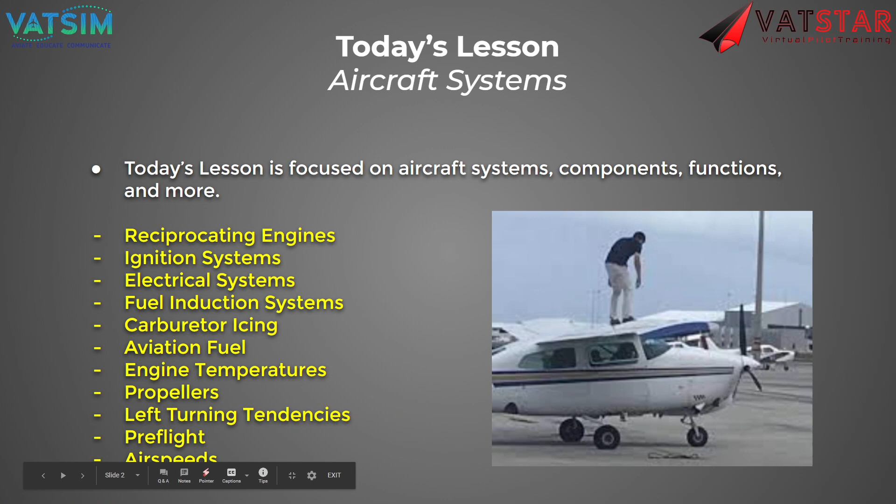And remember, guys, you got to look at aircraft systems from all angles. I mean, look at this guy right here, he's really getting it from the right angle. Please don't walk on top of your Cessnas, it's not advised. All right, so we'll get right into it.

Aircraft are powered by reciprocating engines, which are made of cylinders, pistons, connecting rods, and a crankshaft. And that's very similar to most engines in cars.

Does anybody here know what kind of engine you'll typically find in a car? Is it a certain shape? Anybody want to step up and answer that? How about Andreas? You know what kind of engine you'll usually find in a car, what shape they are? I have absolutely no idea, I'm not really a car person. All right, that's no problem. Anybody here a car person? What's the most common shape of a car engine? Anybody know?

Inline four piston. Oh yeah, inline's one. Inline is one, Danielle. Yep. And all right, I actually didn't see who that was, I thought it was Danielle. But yeah, you typically have inline, right? Or you have a V shape, right? You hear of a V6, V8.

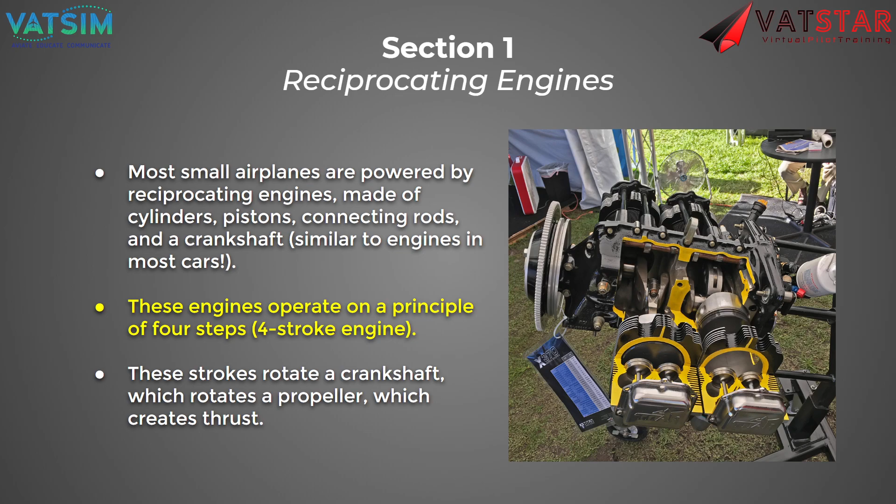When it gets ignited, it explodes and forces the piston back downwards. That explosion we call the power stroke or combustion stroke, and that forces the piston back down and continues to rotate the crankshaft.

The last and final stroke is when the piston returns back to the top, it pushes those gases out the exhaust valve. So you have gas and air coming in through the intake valve, being compressed and ignited, and then being pushed out the exhaust valves. Anybody have questions about that?

Just like a car. Exactly, it's exactly like a car. It operates on the same principle.

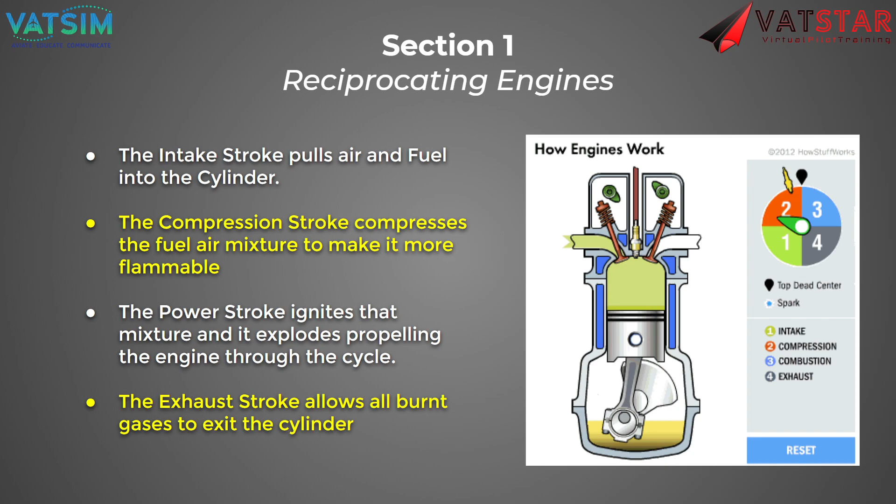A little acronym we use, this is a good way to remember it: suck, squeeze, bang, and blow, baby. That's the way you remember it, right? You got to suck in that air, you got to squeeze it, compress it, you're gonna hear a bang, and then it's gonna blow the rest out. That's a little humor in there for anybody that is into that kind of stuff.

Let's talk about how that air-gas mixture is ignited. Reciprocating engines, we're not talking about diesel here, diesel is a completely different story. But gasoline reciprocating engines require a spark.

Most engines have a self-sustaining source of electricity called a magneto. These devices use the mechanical energy of the engine, so they're connected to it. They're geared into the crankshaft of the engine, which is where the propeller is connected. There's a center cylinder that's rotating inside the engine, and these magnetos are basically a magnet, similar to an alternator, but not quite.

They generate a spark, it's a magnet and a coil of wires that generate a spark when turned. This spark is what ignites the engine, keeping it running. The magneto is not connected to any other part of the electrical system, so when we say it's self-sustaining, if you turn the master switch off in an airplane but have the magnetos on, the airplane doesn't need power from a battery to keep the engine running, because it's getting that energy from the engine. It's taking mechanical energy and turning it into electrical energy to spark the engine and keep itself running.

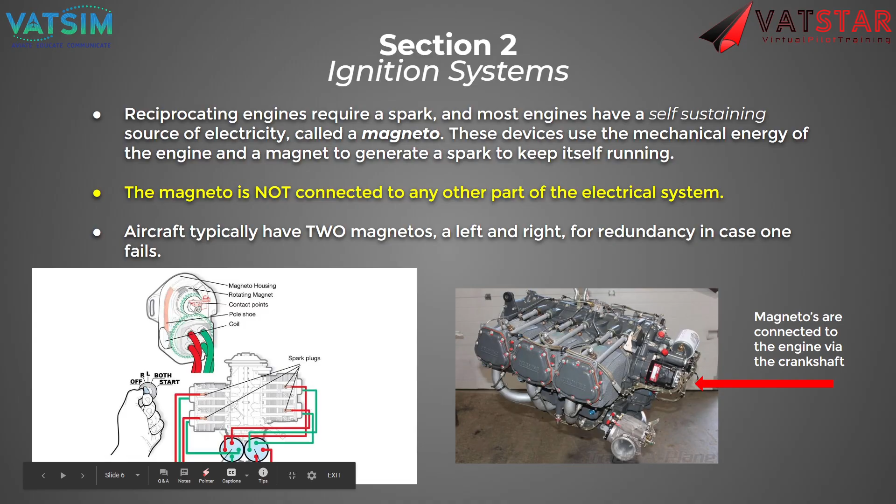I got a question. If you operate with only one magneto, how does it affect the plane overall? You're gonna see less RPM, less performance and less power. So typically you want to use both magnetos.

But if you operate with one, how much time can you fly? You could fly indefinitely, but if you lose that magneto, you're going to lose your engine. You will fly on one magneto, that's why you have a left and right one. But you always are supposed to have two in operation because you get the better power output, and that way, in case you lose one, you still have the other and can make an emergency landing as necessary. You're not really supposed to fly with just one magneto.

It's a maintenance risk, it's a flight hazard because you're now at a higher risk of losing your engine, right? And you also won't develop the same amount of power, so you're not going to get the same performance, and you're not using the aircraft to the extent of its abilities. Does that make sense? Yeah, thank you.

No problem. All right, let's move on. We're going to talk about electrical systems very briefly. All you need to know is aircraft typically have a 14 volt or a 28 volt electrical system, supplemented with a battery, an alternator, or generator of the correct voltage. So if you have a 14 volt system, you want a 14 volt battery and a 14 volt alternator. If you're a jet or a newer GA plane with a 28 volt system, you'll have a 28 volt battery and a 28 volt alternator or generator.

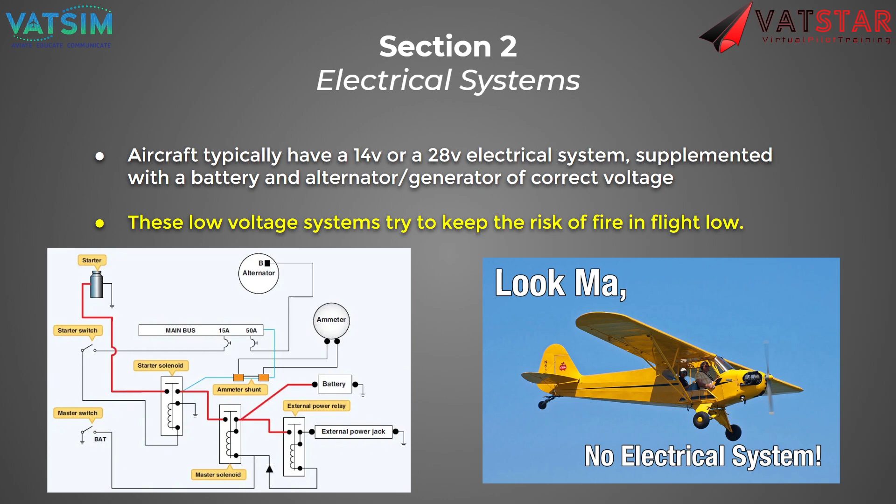All right, now we're going to talk about the way that airplanes actually get fuel to the engine, right? So aircraft, like cars, usually use one of two forms of fuel induction to power an engine. When I say fuel induction, I'm saying the way that the fuel transports from the tank and gets into the engine and then proceeds to be burned. Does anybody know how most cars are powered nowadays? How about, let's call on somebody. Robin, you got any idea what kind of a fuel system a car has nowadays?

Aren't they pumps? There is a pump involved, but I'm more referring to the way that it gets to the engine. If somebody knows, go ahead and shout it out. Fuel injection. Yeah, there you go. Direct injection, fuel injection.

That's the way that most cars today, modern cars, are given fuel. But airplanes, even new ones, a lot of them are coming out with carburetors still because that's just technology that airplanes have always had and they've proven to be reliable. So carburetors work by mixing air and fuel in an unpressurized chamber to create a combustible mixture, and we'll explain both of them in a little bit.

We're going to go into the next slide. But fuel-injected airplanes are quite different. They actually mix the air and fuel directly before combustion, sometimes even in the cylinder, and that is where we get the term injection from. The fuel's injected. So we'll go to the next slide here, and we're going to talk about carburetors.

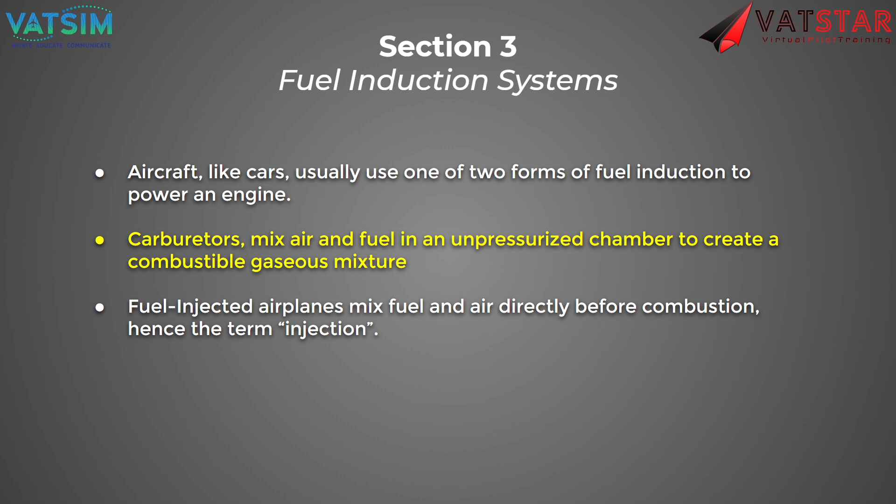So this is a little GIF I found of a carburetor, and you can see coming from the left here, you have air coming in. And as that air comes in, you get a low pressure area. So going back to last week, we talked about Bernoulli's principle, right? As a fluid speeds up, its pressure decreases. Does everybody remember that? If you were here last week or watched P1, do you guys remember that principle?

Right. So what happens here is the carburetor actually gets thinner, and this is what we call a venturi. So when the air comes in, it has to speed up because the volume is restricted, hence the pressure drops. And what happens when that pressure drops is fuel will actually get sucked into the air, because you're essentially creating a vacuum in the fuel line, and to equalize that vacuum, this fuel gets sucked up into the air. And what happens after that is that fuel-air mixture is now combustible, and that proceeds to the engine.

Now you might be asking, well, how does that regulate engine power then? Well, if you think of it, as soon as you open the throttle - this is the float valve, and that's connected to the throttle, and this is the throttle valve. What happens is when you push the throttle forward, this valve opens, which allows more air in and increases the speed of the air, which sucks more fuel, which allows more fuel to go to the engine and be burned. And that will create more power to the engine.

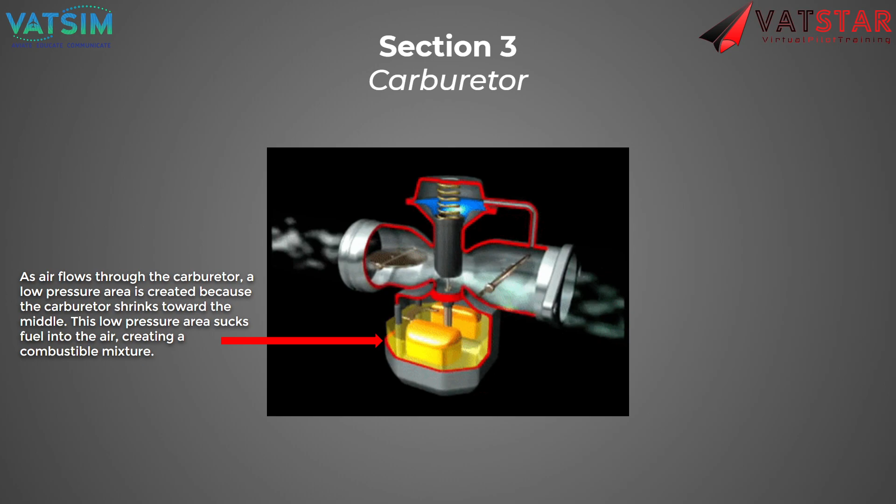Yeah, I got it. Right. So because of the decreased air density, you need less fuel, and that's what you use the mixture for. But the carburetor can't do that on its own, so that's why you adjust the mixture. The carburetor, unadjusted, will operate the same way, but you have the mixture to compensate for decreased air density. The carburetor doesn't care about air density - it's just allowing air to either go through or not go through.

All right, let's move on to fuel injection.

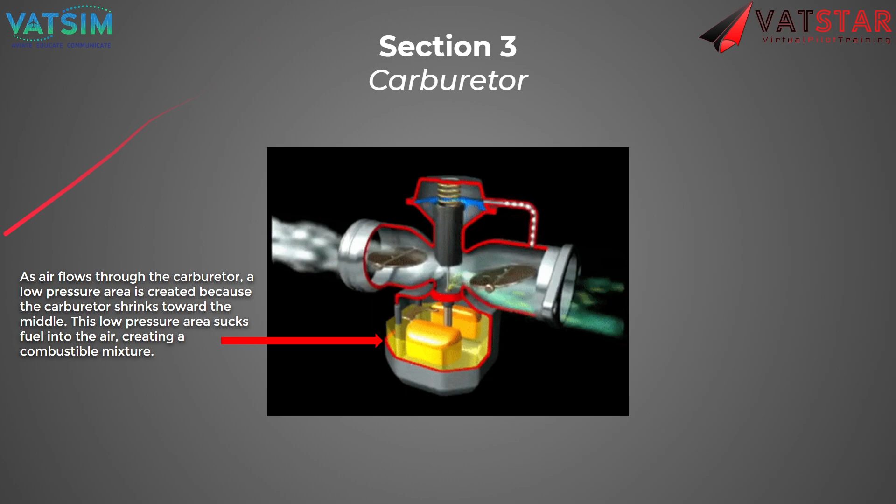This is a GIF of a car's cylinder. In a fuel injected engine, the air is actually mixed right before or inside the cylinder. On this GIF, you'll see it's mixed outside. High pressure fuel is mixed with air during the intake stroke of the engine. You have air coming in through the intake manifold, and here you have a fuel nozzle.

This high pressure fuel is aerated when it's compressed, hence high pressure, and it's injected. During the intake stroke, the intake valve will open, and that high pressure fuel and air will get sucked into the cylinder, get compressed, and ignite. You'll see here it ignites right there, and then it gets pushed out the engine. So those are the four strokes.

But if this was a carburetor, you wouldn't have this fuel injected nozzle here. It would be coming straight from the carburetor, pre-mixed. Does that kind of make sense?

Yes, sir. All right, four strokes. Exactly. All right.

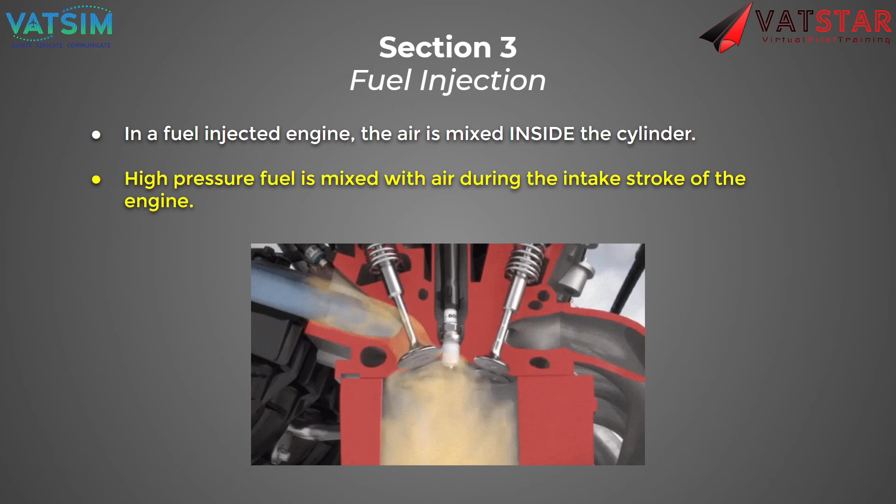We talked about carburetors before, but now we're going to talk about some of the downsides of a carburetor. This here on the right is a carburetor. You have air that comes in, gets shrunken down, decreases its pressure here at the venturi, and then flows out after it picks up fuel, and that goes to the engine.

Most of the time, when air expands after it's mixed with fuel and after proceeding through the venturi, it actually cools down a significant amount. It drops its temperature. That causes a lot of problems because if you have moist air coming into the carburetor and then mixing with fuel, that moisture, when it's cooled, forms ice.

Now, does anybody here have an idea of why ice might be a problem in the carburetor? Does anybody want to take a guess at that? Engine roughness. Okay, that's one thing.

But what would happen if our carburetor completely iced over based off what we've learned so far? No air. That as well, but right, we're getting no air, and because we're getting no air, we're also getting no fuel to the engine. So essentially, we're cutting the fuel off to the engine if the carburetor ices. You're basically going to starve the engine of fuel. It's gonna shut off if you ice off that carburetor. You're getting no air and no fuel to the engine.

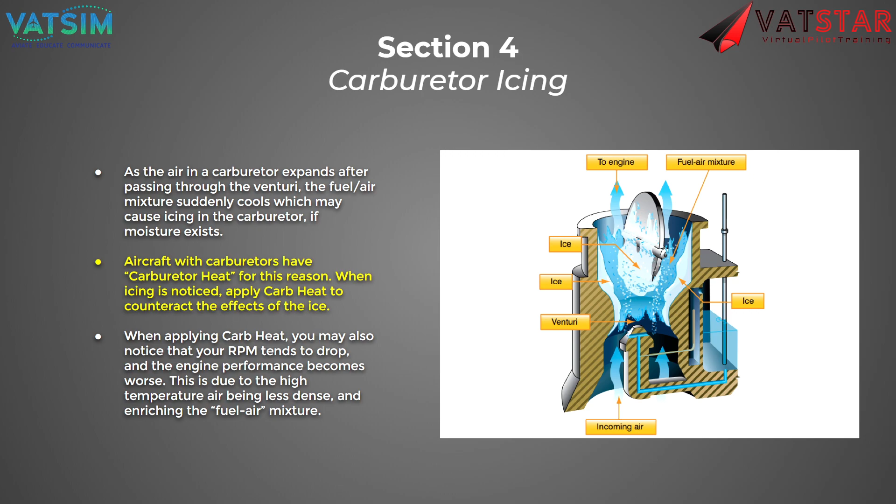Okay, thanks. All right, let's talk about aviation gas. I know the octane ratings are different in Europe than in the US. Daniel, you're obviously from somewhere in Europe - what kind of octane is usually the petrol over there?

For cars? I'd say 75. That's for a car, Daniel. I believe so, I could be completely wrong. I think that's what it says on the fuel pump.

Okay. And Catalan, did you say something? I heard you say yeah. I think here it's about 95 to 99, something like that. That is very high. Okay.

Anybody here from America that knows the answer - what's our most common gasoline here in the States? 87 through 95, I think it is. Yeah, so usually it's between 87 and 93. 87 is that regular unleaded fuel - unleaded meaning it has no lead in it, the literal metal lead. And 87 is kind of what most cars take nowadays. If you have a higher end car like a Mercedes, you might put 91 or 93 octane in it.

Just a quick explanation of what octane is: it's essentially the combustibility of a fuel, or how much compression it'll take before it explodes. Not everything needs a high octane fuel, but airplanes do - they're very high compression engines. So the main fuel you'll find in airplanes is called 100 LL, which stands for 100 octane low lead, and it's a leaded fuel.

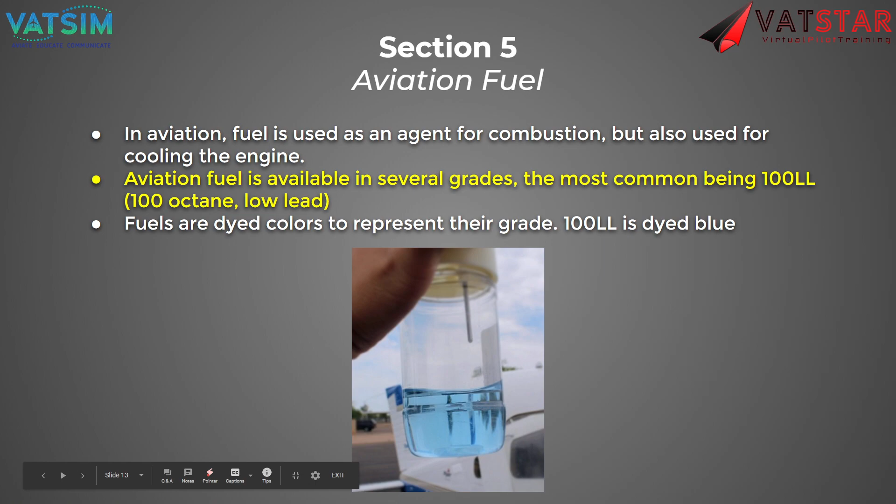So this is a little bit of a long slide, but I'll try to be quick with it.

One quick question concerning fuel: what is the freezing temperature of 100 LL? I'm not too sure on the specifics. It's below 0 degrees Fahrenheit, below like negative 15 C. It's a very cold temperature, most places it won't freeze. So generally nothing to worry about also in an airplane. I'm gonna actually look that up right now for you. It's about... apparently negative 58 degrees Celsius is its freezing point. Okay, nothing to worry about. Thanks. Yep. All right, so to continue. Maybe in Siberia. Yeah, right. Exactly.

Okay, so getting back to fuel. We talked about the importance of using 100 low lead, that blue fuel. Now, let's say we put 87 octane, regular gasoline from the gas station, and you put that in a plane.

You're at risk of this thing called detonation. Detonation is the uncontrolled, spontaneous explosion of the fuel and air before it's supposed to happen. So instead of happening on that power stroke like we talked about before, it might happen halfway through the compression stroke, and that becomes an issue because you're not developing the right amount of power and you're screwing up the way the engine rotates. Now, this detonation, you're having that fuel explode at the wrong time, and it's actually causing an excessive amount of heat to be generated.

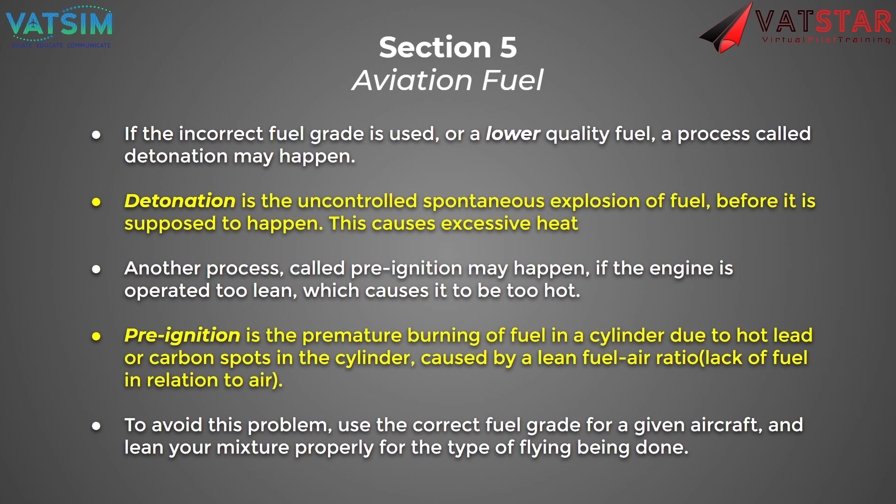All right, fuel systems. So we've been talking about fuel this whole time, let's talk about fuel systems. Most aircraft will have two fuel pumps: one is engine driven, and the other is an auxiliary electric pump in case of failure of the engine-driven pump, as well as aiding with startup.

So think about a 172 R or S model, the ones in MSFS and X-Plane. Those planes have an engine-driven fuel pump because they're fuel injected, and fuel injection needs a pump to create high pressure. But they also have an electric pump, right by the lights, all the way to the left of your light control, and that's the high pressure pump you use to prime the engine on startup.

Now if you look at like a Piper, they have an engine-driven pump both because they might be fuel injected, but also because they're a low-wing aircraft and you need a pump to suck fuel out of the wings into the engine. On older 172s, they don't have an engine-driven fuel pump, and they get fuel to the engine by using gravity—the wings and fuel tanks are above the engine, so the fuel will just naturally fall into the engine.

So if you do aerobatics and fly upside down with a top-winged aircraft that doesn't have fuel pumps, the engine will stop at some point.

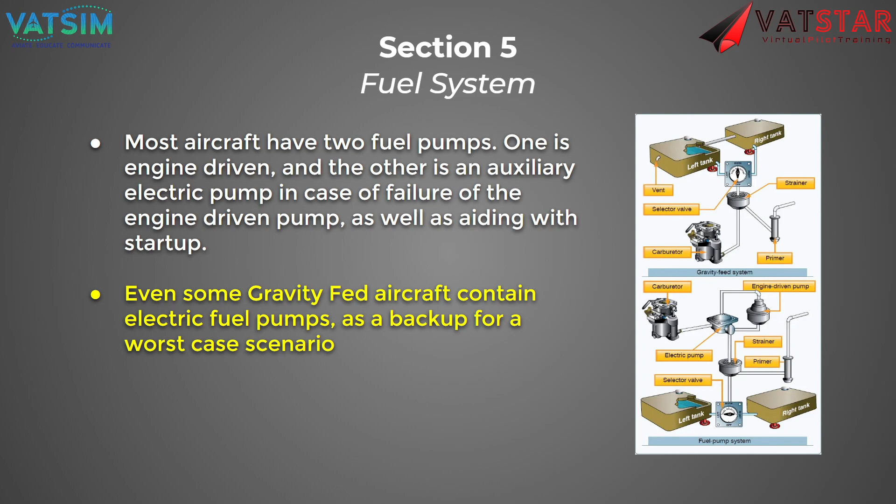All right guys, spoiler alert. Sorry, we needed to relieve some of this tension in here. So, spoiler alert, we're going to talk about oil next.

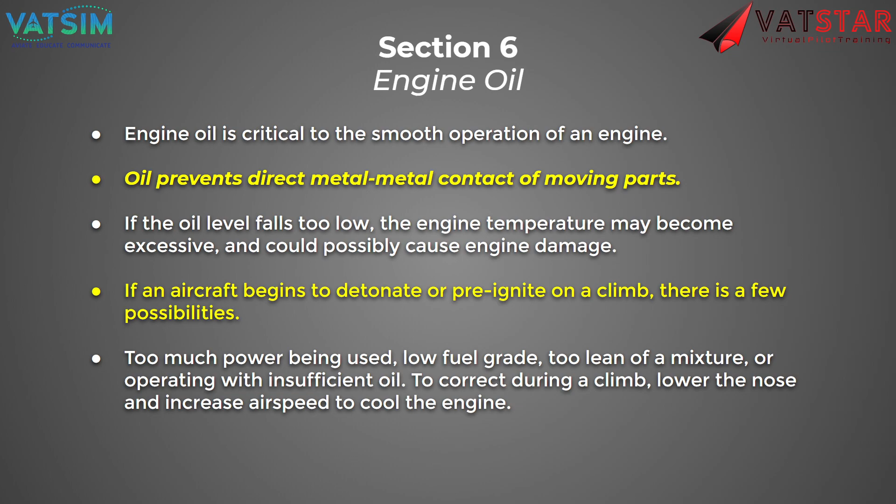Now we're going to talk about propellers, and this might be a little bit complicated, but I'll try my best. Again, Brian, feel free to step in if you feel like I'm missing anything. So a 172 is what we call a fixed pitch propeller aircraft, which means that the propeller cannot be moved in flight. The blades are kind of fixed, one big piece of metal, set by the mechanic based on whatever kind of propeller you have.

And because of that, we can say that when you move the throttle, you're actually controlling the power output of the airplane. Now, some airplanes, and you might notice in X-Plane or MSFS, have a blue knob, and we call that the propeller control lever. These aircraft, we say they have what's called a constant speed propeller.

So when they say constant speed, they're referring to the ability of the propeller to maintain a certain RPM. When you move that blue knob in the cockpit, what you're doing is actually setting an RPM on the tachometer. And you'll notice if you were to move that all the way down while you had the throttle up, you could position it at any RPM you wanted.

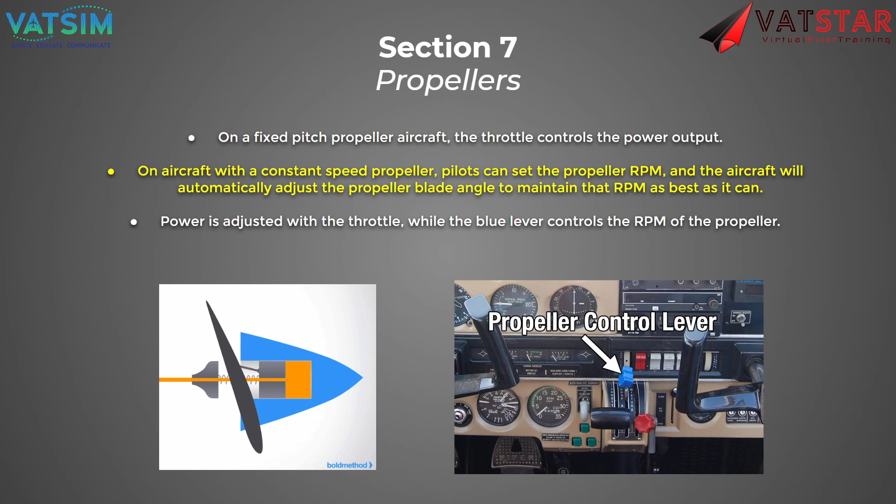Yep, awesome. All right, so I think Brian covered that pretty good, a lot better than I was explaining it. But we'll move on here.

So now we're going to talk about left turning tendencies. Have any of you taken off and noticed that your airplane likes to rotate to the left on takeoff? Always, yeah. So have you maybe thought, well, there's got to be a reason it's doing this? I know a lot of people on Facebook groups for MSFS and Discord ask why is my plane turning to the left? Well, there's a couple of phenomenon that explain it, and a lot of airplanes have these things called left turning tendencies.

Airplanes that have a clockwise rotating propeller - and when I say clockwise, let's say you're sitting in the cockpit and the propeller is rotating clockwise - they have a tendency to rotate or yaw to the left, and there are 4 main reasons for this. Probably the biggest one is torque, and that goes back to Newton's third law. You have a propeller rotating to the right, or clockwise. Newton's third law says for every action there's an equal and opposite reaction. So that opposite left turning, counterclockwise force is torque, also called the reactive force, and it forces the plane to the left.

Another tendency is called spiraling slipstream. As that clockwise rotating propeller creates thrust, it actually sends air spiraling around the airplane. It goes underneath the airplane, comes back up around the left side, and hits the rudder, pushing the rudder to the right and forcing the nose to the left. That's another factor that causes the plane to turn left.

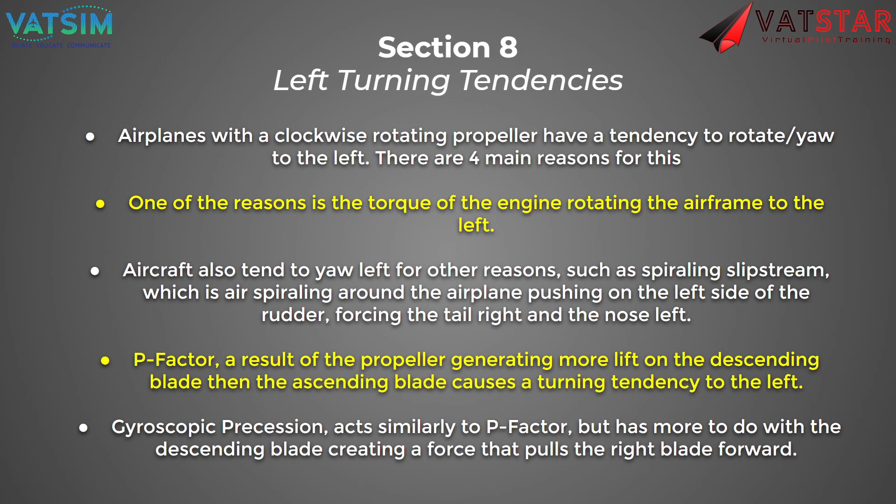You have P-factor - the blade that's descending creates more lift, which pulls this side of the propeller forward, causing the tail to come right and the nose to come left. And you have gyroscopic precession, which causes a yaw motion to the left, because as the propeller rotates there's more weight and a force that acts 90 degrees to anything that rotates, causing you to rotate to the left. Does that kind of make sense to everybody? These are the 4 forces which cause you to rotate to the left.

Very interesting, I didn't know that. Yeah, it's a very interesting concept, and this explains all the questions I get asked - oh, why does the plane turn to the left? These are the 4 main reasons.

And it's worth saying that not every airplane will have these tendencies. A Boeing 737 won't have this tendency because you have 2 engines for one, so you don't have torque. You don't have spiraling slipstream because it's not spiraling around everything, and you don't have P-factor because you don't have a propeller.

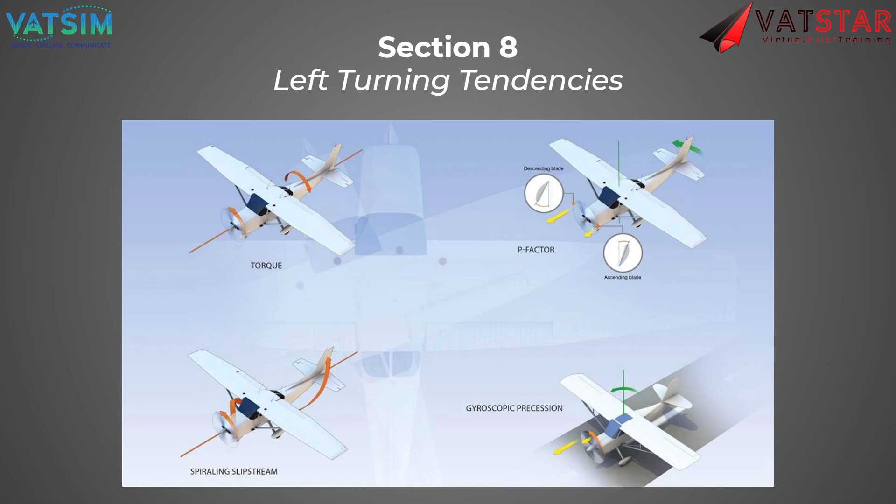All right, so now we're going to talk a little bit about what you should know before you go flying. Prior to every flight, you should do at least a walk-around inspection of the aircraft to make sure everything's in flying order.

Secondly, all pilots should know how to operate their airplane. We like to say RTFM, read the freaking manual. Consult the pilot's operating handbook. Every airplane has one, and it goes section by section on how to operate the airplane.

Thirdly, the use of a written checklist for pre-flight and starting the engine is recommended, because this ensures that all the necessary items are checked in a logical sequence, making sure your engine and the airplane are both good to go for the flight.

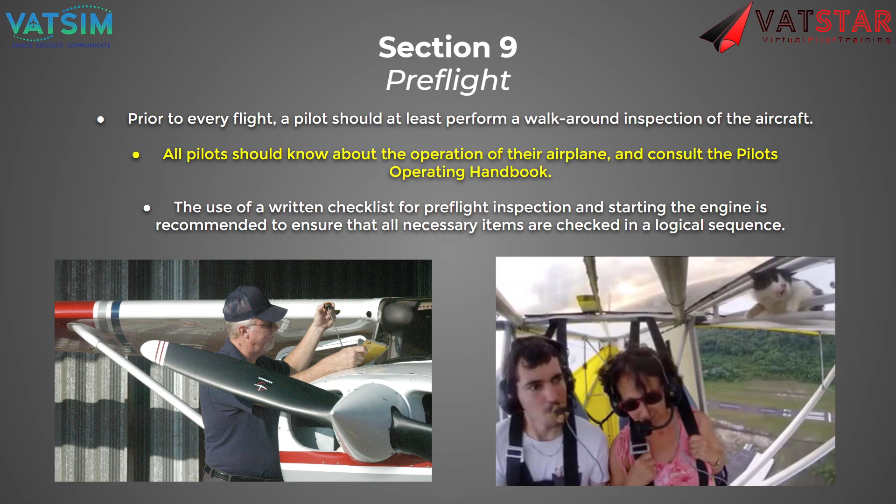Now we're going to talk about something you'll actually need to know for the P1 check ride. For P1, you should know certain airspeeds for your airplane, and every airplane is different, so make sure you read the manual — the proper airspeeds for climb out, for landing, and for stalls.

I wrote down the basic ones you should know for P1, but always feel free to go into more detail. VA is the maneuvering speed. So let's say you're doing steep turns for the P1 check ride — VA is the airspeed you should be at for that maneuver, which I believe is the only real maneuver you'll have to do for the check ride.

VX is the best angle of climb speed. Let's say you're taking off from an airport and there's a 50-foot tree at the end of the runway — how are you going to get over that? In that case, you'd use VX, found in the operating handbook. If you rotate off the ground at this speed, you create the biggest angle in relation to the ground, getting you the greatest altitude in the shortest distance — imagine a really big, 45-degree-angle climb in relation to the ground.